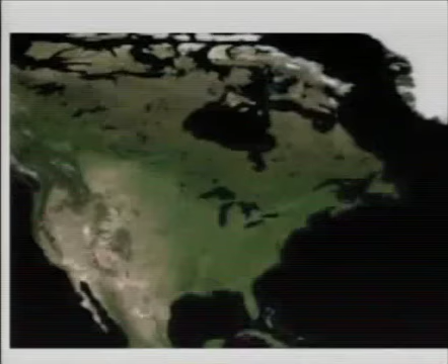The Starchitects, as he coined it, has been really interesting working at the range of scales of projects, as Brooke mentioned some of them already. Probably most importantly, that's where I feel we as a firm, I as an individual, and where I would like to challenge all of you to head, is how to embrace this integrated design into how you take your architectural education and apply it either in your studios or as you go further into the profession.

So I had definitely a back and forth. The family home in Vermont, we're going to see a little bit of that. University of Vermont, over to the University of Oregon, back to the Union of Concerned Scientists in Boston, up to Yestermorrow in Warren, Vermont, over to the Rocky Mountain Institute just outside of Aspen, then out to San Francisco to have an architecture firm with a friend and graduate of this program, Ned White, and then zoomed back finally after meeting my wife. We decided to move back east to be close to family, and ended up in Portland, Maine, or in Falmouth, just outside of there. So that's the map of what we're going to see in this first part.

So where it all began, we all have someone we need to blame it on. I blame it on my parents. They took me at the age of 12 to the hills of Vermont, and we moved into the basement of this house-to-be, and it took us 5 years to get the roof on. We peeled every log ourselves. We call it child labor, I believe.

One summer was spent peeling the logs, then you had to let it dry for a year to let it shrink. And even with that, we had to design the house so it would settle about 8 inches, an inch per log. It was a semi-passive solar house, gravity-fed water, composting toilet. We didn't have electricity for 18 years, until finally my dad's health went down and we figured out a way to get power up to it. But it was quite an experience.

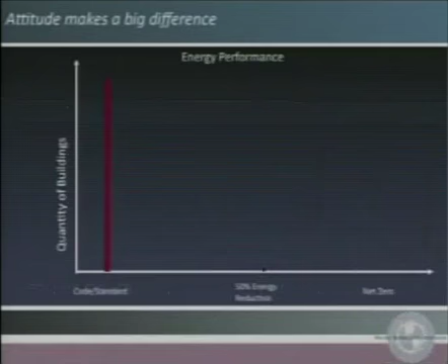And it was the base that this all a lot of, I think my passion early on was understanding about buildings, and you know these statistics, the impact that buildings have, and the impact on climate change through all the effort in terms of where buildings are placed and how they're operated have such an effect. And there's so many poor buildings, the majority of our buildings here, quantity of buildings that are just barely meeting code, and there's so much opportunity out there, was prevalent.

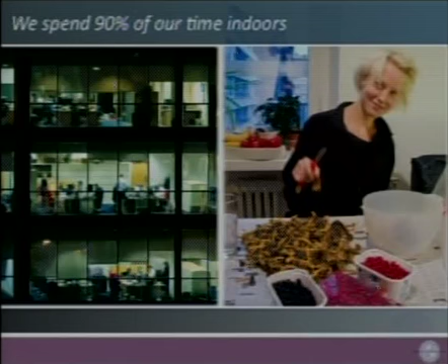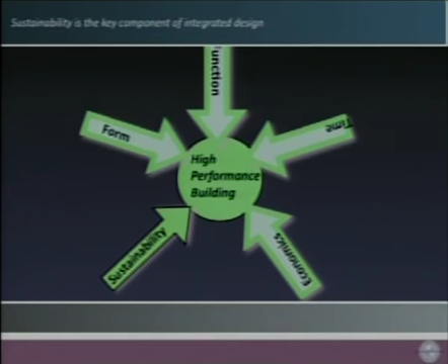And as I went on professionally, then it was, you know, the reality: we spend 90% of our time indoors, and is this the forming of where I wanted to go, this understanding, a lot of it built out of the University of Oregon. This is traditional building, but if we want to go further and really change, it's to this high performance side, it's really embracing this concept of sustainability and what exactly is that and what does it mean. And I still am learning what this means, and still am on a path to figure it out.

Something I did learn, and am still learning, is this whole idea of when do you put that effort in to arrive at a high performance building, and this whole idea that we get lost too much in simple concepts and we're not working hard enough to arrive at a high performance building. What it actually means is that to affect long-term performance and create these great buildings, you have to put a lot of effort in on the front side. I'm still learning what that means and how that affects the work I'm doing and the design teams I'm trying to engage and clients we're trying to lead.

So the University of Vermont was where this sort of started, and I actually ended up self-designing a major in solar architecture and thought that was where everything was going to go. That was helpful, but it made me realize I did want to be an architect, but maybe I should first get some experience out in the field.

And we'll see some pictures of these guys coming along, but two instrumental guys that formed where I was headed was David Sellers and John Connell, who was the founder of the Yestermorrow Design Build School. If you haven't sought out David Sellers or heard that name, it's kind of a fun little research project to find out. But for a couple of years, I worked for them doing design build projects, again testing what does this mean to be an architect.

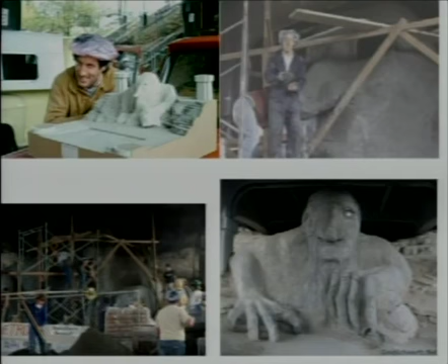A bunch of architecture students went up to Seattle. Steve Badanes had won a competition to design the Fremont Troll under the bridge, and a bunch of us went up there. I got to put the concrete in the nose, but it's continued on as a great little effort, especially at Halloween. That's an actual size there of a Volkswagen Bug.

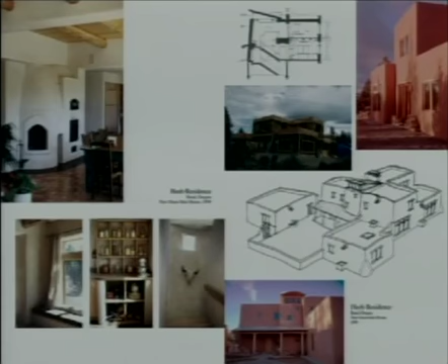Style was one of those things too that I quickly realized I did not have, and I'm okay with that. A client came to me and said we want to do an interior kitchen remodel, and they picked these cabinets, and I just went with it.

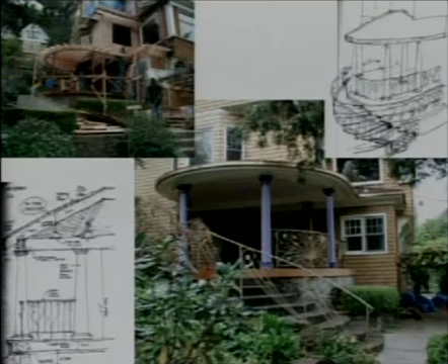You're walking around with a client, looking at different finishes, trying to develop what's their aesthetic. And I was like, wow, okay, here we can go. But there were a whole bunch of projects with Ned. They're smaller scale, residential.

Colors, the whole idea of engaging sketching - Ginger taught that to me early on, and how critical that ended up being, quickly being able to communicate. With the design build background, being able to do a quick sketch for a builder to apply to a design is absolutely critical.

A family friend ended up calling for a large project on the East Coast that I wasn't sure I could handle due to the scale, or whether I wanted to from a sustainability and environmental perspective. This was Lake Winnipesaukee in Wolfboro, New Hampshire. They had been going down a path with another architect who just wasn't listening, and asked if I could just come as a favor to look at it.

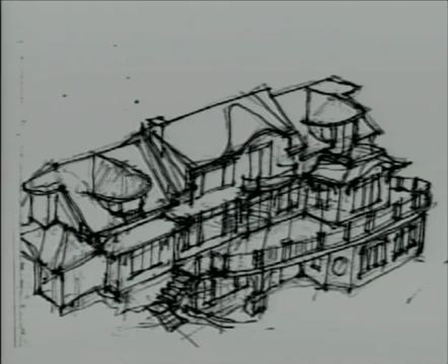I started sketching over the other architect's plans. The husband was kind of really into the macho thing, and the wife, Sheila, really wanted a little more sex appeal to the house. We ended up with something like this, but at 8,000 square foot house, I was going, what am I doing here? But they wanted it. It was an interesting opportunity, and we went forward and built it.

There was an existing house here - you can see some of the curves from another building. Here's one side of the building. I'll go through these quickly in the interest of time. But a pretty crazy roof - Howard's over there shaking his head. Oh my goodness. But the details, I think, are what were fun.

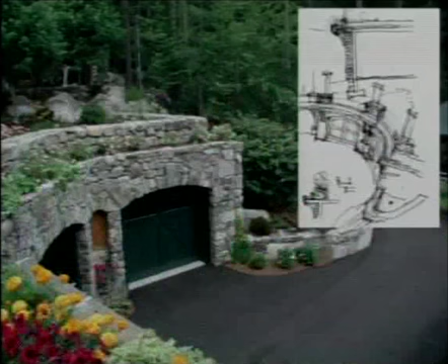The craftspeople that got involved in this - the client was willing to spend the money to look at ways of hiding the garage, dumping it into the hill, trying to work with sketches. The stonemasons were really, really excellent, trying to find those lines and connect them together from a detail perspective, trying to bring the rocks up, and how do you swoop that out appropriately. And then, oh yeah, the windows - how do you do the detail of that? That was a good exercise, Don.

The owner, Dave, was playing with blacksmithing, so he got involved in the project. They were embracing lots of craftspeople to participate, so they had little birds done.

The little sculpture - I designed the deck so all the water would go off this corner of the deck, and they got a sculptor involved, and arrived at this bear holding some fish. You can see down the bottom here some of the fish that got dropped below. So it was just, they were playful, they had fun.

You can see where it connects in and out of the mouth, and Fine Homebuilding put it on their back cover. The house is too big to go as a prominent feature in Fine Homebuilding - didn't meet their criteria, but it was just a fun little piece. The details, I had a lot of fun working through all of these.

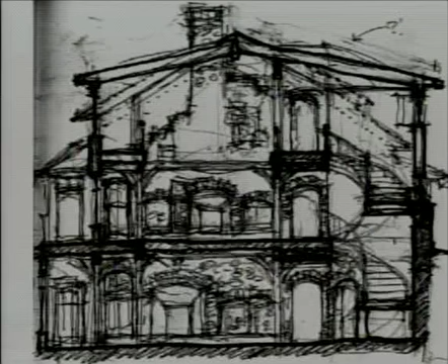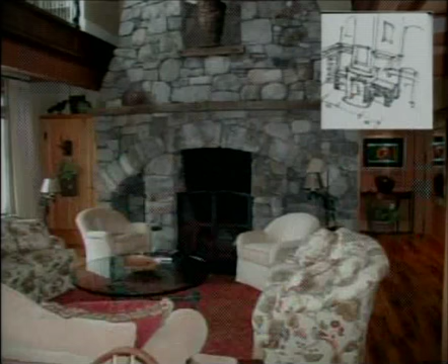Upstairs, the vaulted ceiling, just a gathering little library. They went all out with the tile work and everything, worked with an interior designer and tried to balance all that.

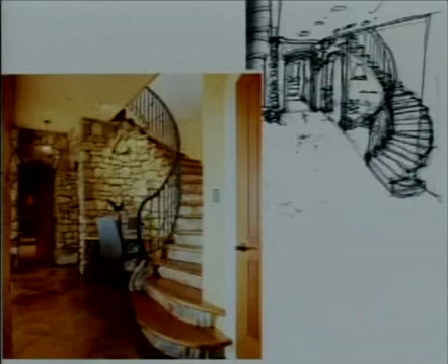Got to have a wine cellar, of course, and you need also the home theater. Downstairs bedrooms.

That was a really amazing project in many ways, but I got them to do foamed insulation, so we made the walls really high performance. The boiler - we were able to work with the HVAC contractor to get the boiler size right.

Worked with as much as I could on reclaimed wood wherever we could. There were so many battles that I couldn't win, but there were ones that I could, and I felt the building overall was a great opportunity.

But when you try to weave in the sustainability, it's going, that's too big, I don't want to keep doing that. It was a great house, and I love going back to visit it.

But the question was now, do I keep going with architecture, or do I fold back into the sustainability and green consulting? My wife and I met and decided to move east to raise our family, and it was a balance. So I continued doing some architecture.

Here's the before and the after of an addition. This is where I was starting to get Fore Solutions going, but was filling in the little holes with some architecture along the way.

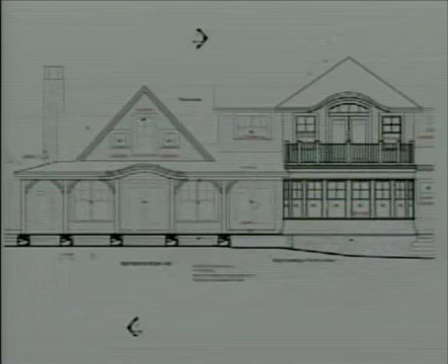This is where I learned that I don't really like hip roofs with pitch roofs. I should have learned that, but I didn't. But it still came out quite nice, the before in the lower right and the after.

Another lake house. And you have to hire the photographer to take some photos to make you look good. But just a nice feel, again, working with materials, natural materials, open sensibility, and just a couple more houses quickly.

Down on Cape Cod for some family friends. Little Compton, Rhode Island, sorry, not the Cape. This was a concept sketch, but that got simplified down from a budget standpoint.

I was just down there actually a week ago taking some photos of it. And this came up, I think, nice from a simplicity and organization standpoint.

They had basically a brother and sister married with kids, so 2 master bedrooms, with the kids meeting in the middle. From a diagram standpoint, this is the back side. It's simple scale, vaulted ceilings, using the space effectively.

Again, good heating system, good insulation, good windows, proper orientation. Oh yeah, I did keep this one in. And then this is one just north of me in Freeport that I designed, but we won't go into the details.

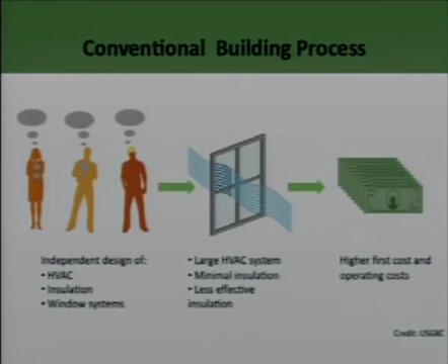But this whole idea of a conventional practice of everyone being in their silos, okay, is what we need to shift. The conventional practice is just getting the work done and not working together in sort of an integrated fashion where spending more money on the windows makes sense, right?

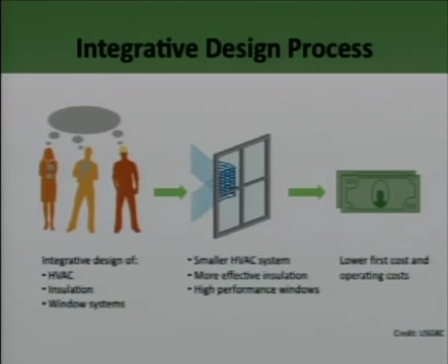Because by doing that and getting a better envelope and better insulation, you can downsize your heating and cooling systems, and that pays for the extra investment into the windows and the insulation. But that can't happen unless you get the design team together and do the analysis and do the math.

And that's something I know it's really hard in architecture school to put your engineer hat on when there's not a strong engineering department here at the U of O, and how to weave that perspective into what you're doing. So as much as you can, try and think that way.

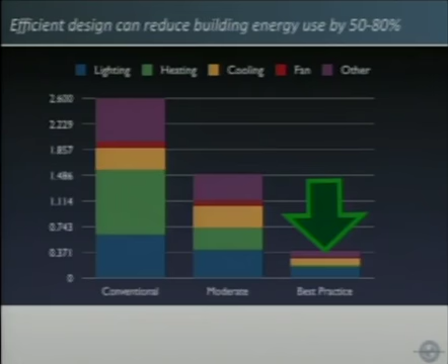But we're really finding some great success in lining up the team and walking through good design solutions that are trying to drill down to get those energy savings in there. And those initial things, and Oregon's great at this, siting, orientation, massing, is going to affect the long-term performance of your buildings without really affecting the budget.

And this is where so often we start working with an architect and they say, Gunnar, no, we'll get you in soon, don't you worry, we'll take care of it. And those initial sketches about programming that they're working with the client, trying to make sure the square footage can fit on the site, all of it is what starts driving the whole design.

And that simple move of the orientation is going to affect the long-term performance without adding any dollars to the building. So then you can do more. You can add more into the building, more controls. Green roofs cost more, but they slow down the rate of runoff of stormwater. And that could be good for a multitude of reasons.

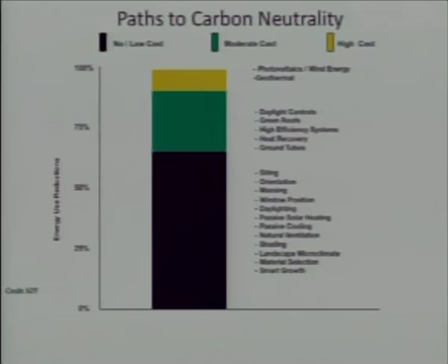And if you're trying for a carbon neutral building, yes, you may have to spend some money in order to arrive at it, but you try and do all these other things first before you start investing into those pieces. So the balance then, as a company, as a consultant, is how to weave in the environment and not let the economics be the driver. Because we're building buildings that are going to be around for a long time and affect the health of the occupants. So how do you bring that all together from an integrated design approach?

The contracts are an interesting one, and I'm not sure if this is still part of the curriculum here, contracts. Those are one of the pieces as an architect we don't really want to do. But the typical linear design process is going through schematic design, DD, and by the time you get to CDs, it takes quite a while.

And then the reality is you're getting to this bid negotiate, bid negotiate, bid negotiate, and that's actually where the value engineering is occurring. What we try to do from an integrated green building perspective is do that value engineering all the way through by doing the math and getting in and doing the energy model, spending more time in schematic design and basically getting the engineers to sit at the table.

And get the ducks aligned with the structure, size things appropriately, ask the right questions about envelope. And by the time you get to CDs, everyone knows how to put it together because they've all been at the table. Versus, I'm the great architect, and here you now heat it and cool it and light it, right? And I know that's inherent in this program, but it's amazing.

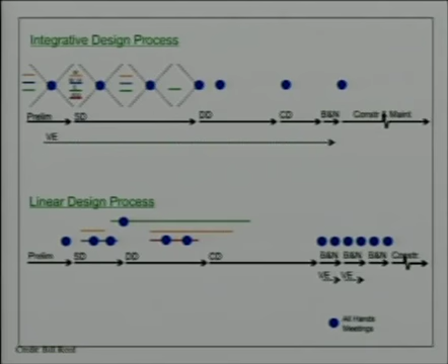Where's the water going? What's the ecology of place? And then you start bringing in the architecture after you've done the analysis.

So planning, mapping out the design process - when should people be involved? And that affects the contracts, right? How are you going to set up a contract to get these folks at the table when you're trying to design and build a building, and you as an architect have a fixed fee of 8% or 10% or 15%, and you have to fit the whole team into that.

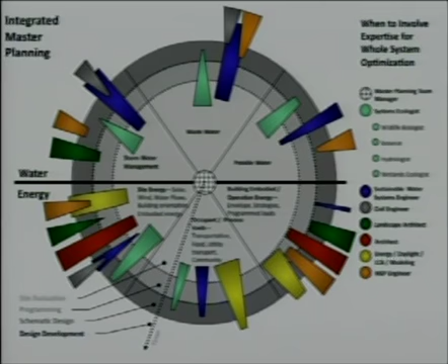I wish I had more clients to cite as success on this, but the goal is getting clients to agree to an initial charrette before contracts are signed. So basically trying to get everybody that's part of the team and the owner into a room for 1 day, 2 days, 3 days, maybe more, trying to design the whole project in a charrette format, engaging with each other, trying to figure out: do we have everybody we need at the table?

And based on that experience, everyone goes away knowing what the client's interested in, capable of. As a consultant, I might realize that engineer's not really thinking outside the box, and we need someone else at the table to push it, because they've already sized the HVAC system for a 40,000 square foot school before we've even worked out the orientation of the building. So something's wrong here. If you're successful that way, contracts are put forward where everyone knows their role, and you have more opportunity for success from an environmental perspective.

Another example: we've been working on a project, the University of Massachusetts Sherman Center. It's a large lab facility underway, and they've been pushing for LEED. We're the lead consultant, but we're also doing the energy modeling. We started laying out tasks for the site based on their schematic design, and they had a major timeline. This seems simple, but the reality is it's not done.

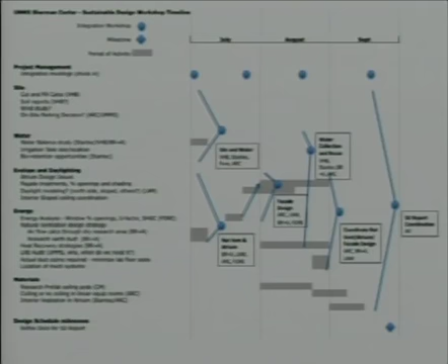Based on the results of that, we can start really fine-tuning the facade further. And once we get all the massing right, we can look into ways to capture water, et cetera. So we planned out meetings of the team to get together - all done after the initial one. It's just a sample of some of the ways that you can design the design process.

The integrated approach is where you get these great results, right? All these aspects come into play when you put them on the table right from the beginning. And it's the success of communication and talking where you get those benefits.

So LEED ends up being a tool - that's all it is. LEED is not the goal. A lot of firms and clients are saying just do LEED, and thankfully we're getting hired sometimes because of that, and it's okay. But what we try to do from a LEED perspective is use it literally as a way to follow good design practice - it's not the driver. Too many times, and that's where if you Google LEED, a lot of folks are pointing fingers at it, saying it doesn't think enough, and there are a lot of people misusing the tool.

It's been very effective, and what it does is establish criteria. It gives a structure for thinking about environmental issues, about how green your building is. We know more about a cookie box off the shelf than we know about the buildings we walk into. That's what LEED is trying to do.

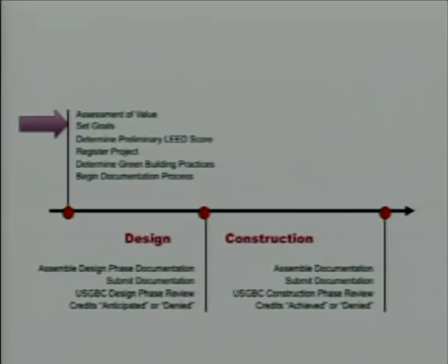It's set up with design credits and construction credits, but what I think is the greatest thing is that it pushes toward front-loading the design process, getting the team around the table right from the beginning. That continues to be hammered on because of the success stories out there about good green buildings.

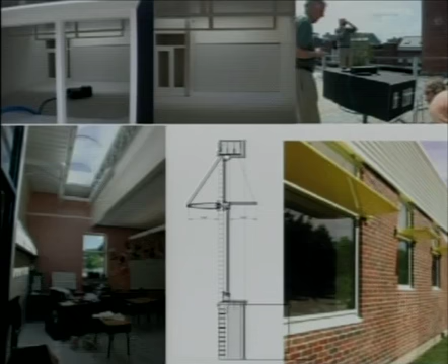This I put in for Ginger's benefit—see, I did learn something, I can do a box and we can do light meters. That does inform design, because what we found is that in this existing building, trying to incorporate daylight, we needed a skylight monitor in the back, because having it just on the south side wasn't enough. Then it was a matter of how you design that, and the architect had fun with the light shelf itself, bouncing light in.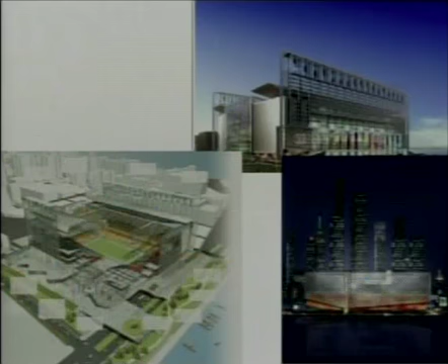In New York City, KPF brought us in for the Jets Stadium when they were going after the Olympic bid, and this was already far along by the time they got involved. There's a lot of beer drunk at games, it turns out, and when you look at waterless urinals, you see the amount of potable water you can save given the number of people attending a game. So we started doing some analysis to help conserve water.

This actually had vertical axis turbines in it, which seemed pretty neat as a concept, but it did not meet the budget at all. In fact, the consultant goofed and misread the wind rose, so they did not produce like they were supposed to. The added steel structure got booted down the road, and that's where the design was headed.

KPF did a whole redesign to a glass box, and that had its own inherent problems. We realized these big architects have neat ideas, but weaving solutions into the architecture and making sure it performs and meets budget was going to be a major problem, especially with the western setting sun on the Hudson.

The design of this project was spanning over the railroad tracks at Penn Station—a pretty interesting site. But what that did was give confidence to KPF, and it was actually Chris Stoddard, another graduate of the U of O program, who brought me onto the shortlist for City Center.

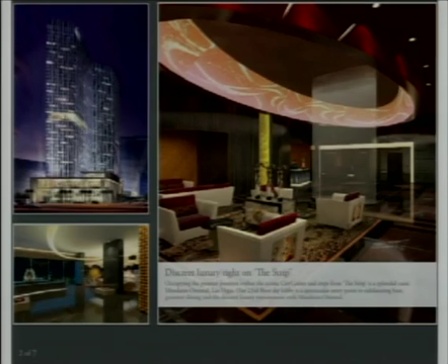This one is a story I'll get into in a second. But it was an amazing experience working with all the interior designers, trying to green them and work with these architects. Unfortunately it meant a lot of miles on the plane to Las Vegas and back from Maine, which is not a green thing.

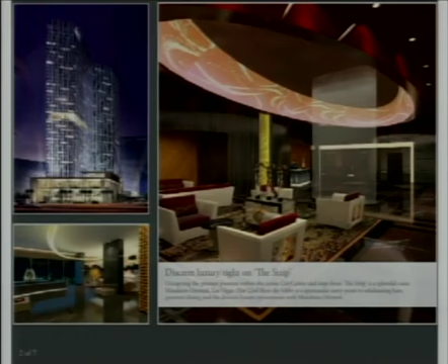It was, do I play with the devil or don't I—similar to the Meredith residence, which was 8,000 square feet. Do I help out these family friends and have some fun doing great design work with great craftspeople? In this case, they're going to build this building anyway, so could I help make it better? Yes, I stayed involved, and there was an amazing amount of design work and coordination effort that went into this.

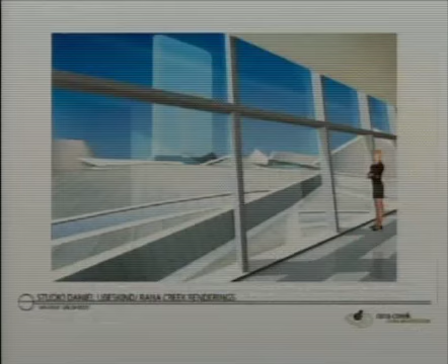Just to pull out a couple of nuggets: this whole roof for Libeskind was a big old shiny roof that, from a heat island effect standpoint, we wanted to do something about. So we brought in the idea of a green roof, but you don't want a green roof in the desert—we really shouldn't be building this building anyway. In fact, Vegas shouldn't even exist, because it's a desert and there's no water. But in this case, let's try to help and not hinder.

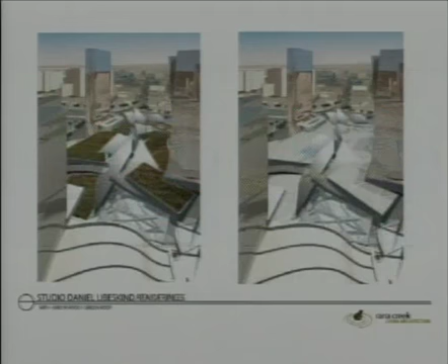There were some really interesting ideas put forward about how to still work with the architecture—this spine shattering up through the roof that lets daylight into the central core—and how we might work with the proper species for that, and handle and maintain it. That did not make it, let's just say.

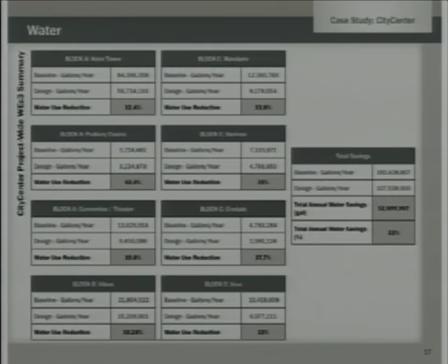But water was one area of success. We ended up with 33% savings over code through choices in fixtures within the hotels. It's a lot of showers, faucets, and sinks, and we were able to work collaboratively with the designers to arrive at low-flow fixtures that met their aesthetic, achieving major savings across the board.

But a crazy amount of materials and steel, and this is, for many reasons, not a green building, and we can debate that all night, but the fact is, it went forward.

The biggest thing I think from this was the corporate shift for City Center, for MGM Mirage, saying we're gonna make a green building. What does this mean to us? They took it on, and they are using it to help foster change in all their projects globally. So it's really interesting from that perspective.

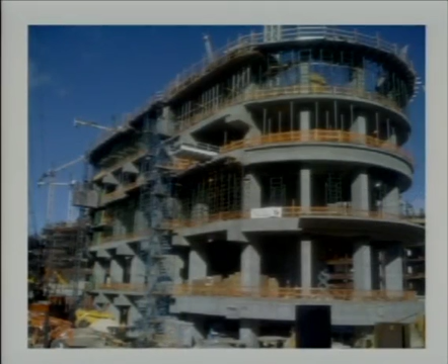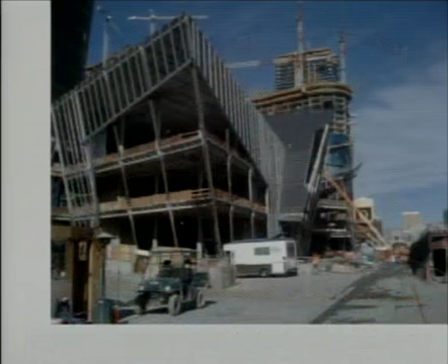Just a very quick story: this Harmon Hotel ended up getting put on hold because there was a major structural problem where these beams needed to have the rebar go out to a horizontal bond beam and wrap around the rebar that was going horizontally. The structural contractor didn't do it, and they found it too late, after the facade was already going on, and put the whole project on hold. In fact, they had to knock off the whole residential tower on top and not build it because of the structural implications. So that project is just shelled and dormant. Talk about some lawsuits—not my problem, though, I'm glad to say.

And you can't have a glass building in the desert and still try to get to 14% better than ASHRAE code, which is a requirement for a LEED building. So here are these horizontal light shelves, shading devices, that wrap around the whole building, which many, many times were tried to be value-engineered out because they cost too much, and they were able to keep it.

Because they couldn't build the building and meet the standards the client had put forward without them. So the Foster—actually the blue tinting was not their original concept. They had so many other great ideas to meet it, but they did not have the budget to meet it. So it was an interesting case of hiring the star architects, setting budgets that weren't real, and saying 'now go do it green,' without communicating the implications of that.

So a lot of lessons learned here. I think it's still a success in many ways, but not necessarily the one you want to tout as the greenest building you've ever seen.

But it was just, they're my kids, bringing them along—this is what Daddy does. We work on big buildings every now and then.

There's inside, there's a couple of shots of the Libeskind project, just amazing spaces, but with a neat feature—we were able to maintain, in the lower portion, radiant cooling in the primary pedestrian area to help temper where the people are, right? Buildings don't need heating and cooling, people do. So you put it where it needs to be, and that was a great energy saving for a building this scale.

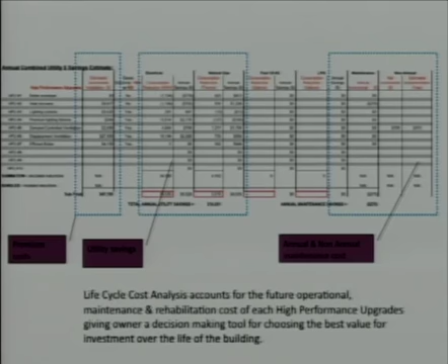I'm going to jump through because of time, but here's just an example of the analysis we do on projects when we get brought in. It was an auditorium building, and we had a lot of pushback initially from the HVAC contractor and engineer. We helped go through a whole effort of looking at utility savings based on different high-performance upgrades—lighting controls, heat recovery, a bunch of different things. But the biggest move was right here, where we introduced the idea, and the engineer was pushing back on it for the longest time.

Finally they went with it—the simple idea of putting the air where the people are. So we delivered the air into the seats for the auditorium and returned it up high, and that was one of the measures we went through. While it cost more, we were able to pencil it out, show the energy savings, and convince the owner to go in that direction through doing the math during the design phase.

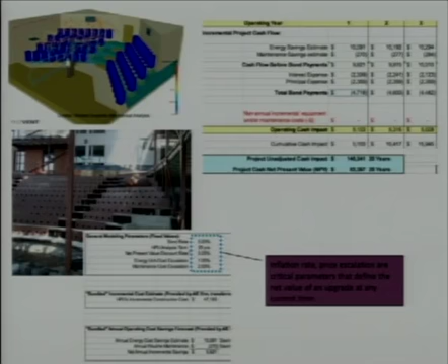And so this is during construction, pulling together. So that was kind of fun.

LEED for Homes is something we do in the state of Maine. We're the LEED for Homes provider. And just a couple of fun examples.

I know time is of the essence here. There's Norman—I've never met the guy, although I've been working with Foster and Partners for quite a bit. This is what their studio looks like, and that's only a small portion of it in London. But this is an opportunity to see all these different offices and how they engage in projects, how they work with their employees, the dialogues that you have.

It's been a really interesting path to go on. And I think the one of these architects we've been working with that have an international reputation that I've enjoyed the most is Behnisch—Brooke worked for them, and they bring us in. They do green buildings. This is the Harvard project I'm going to go into some detail on.

It was the Harvard Allston Science Complex across the river. They're building a whole new campus, and Behnisch came up with the idea of creating a quad, the true Harvard way, through 4 buildings versus one big massive one. And they designed platinum level buildings. In this case, the client only wanted gold, so this was the first time we were hiding LEED credits from the client.

No, we're not sure we're going to get that one. We better not—so we were worried it was going to get concepts cut or get value-engineered out. But Behnisch brings us in because they don't want to handle the paperwork and sort of herd the cats in that regard, and we're happy to do that for architects like Behnisch.

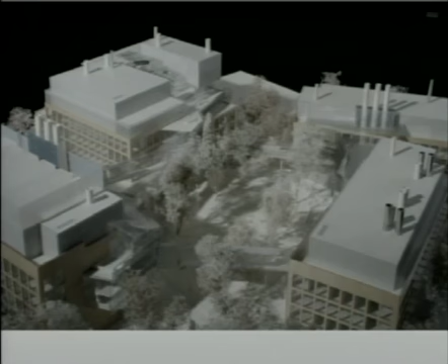But the different buildings—again, I know I'm moving quick through these, but I'll blame it on Colin and his roommates who said more pictures is better than less. So we're on the more pictures side here. But here are building 1, 2, 3, and 4.

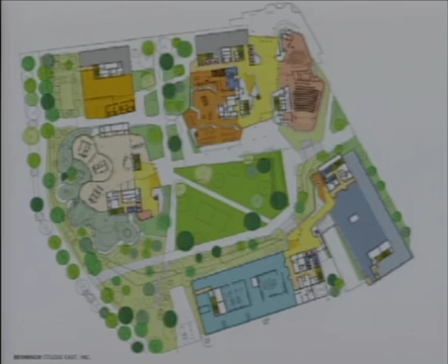You can see some of the organic shapes that Behnisch is great at incorporating. So you have the face that meets the public and the street edge. Start noticing what's going on with the facade here—they're really good at changing the facade to address proper orientation in terms of climate and engaging with the streetscape.

And this is an interior courtyard, and they do a lot with what are called winter gardens—tempered zones that help with transitional spaces, also used when the climate's right for tempering, just hot air rising and exhausting up and out, without needing fans, pumps, or motors, while still engaging in a very dynamic building.

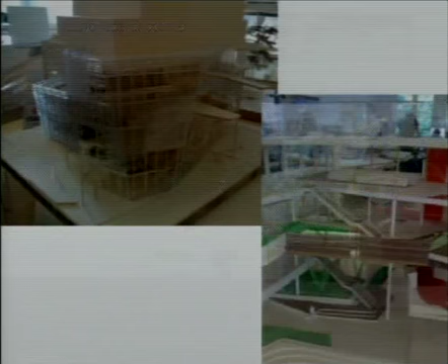A model of that in the Stuttgart office—here's the engineers for it, Transsolar. If you want to explore what some innovative engineers are doing out there on projects, I urge you to look at Transsolar. In this case, they came up with the idea of bringing an earth duct into the base building to use the earth's consistent temperature to temper the air into the atrium spaces.

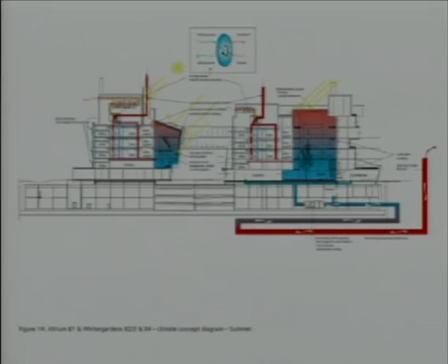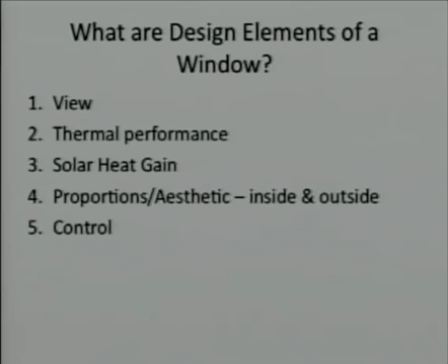Then the same concept in some of the winter gardens, allowing the air to exhaust at the top, and a myriad of other ideas. But I think the whole idea of the window is a good little exercise. What are the 5 things that a window does? View, thermal performance, solar heat gain—you have to control that—proportions, aesthetics from the inside and outside, and control. Does it have a level of operability? Did I miss any? I think I got them all.

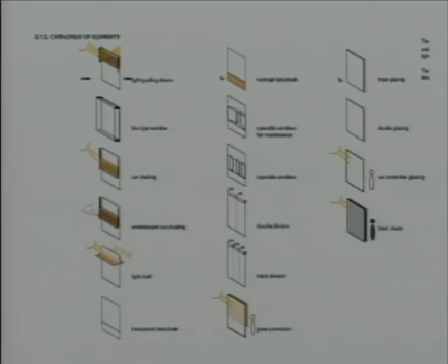That's where I thought. But here's how Behnisch takes it from a design perspective even further. Here's this whole facade package that was going out, looking at different concepts they were using to explore windows in terms of wind resistance, exterior shading, light shelves, level of transparency, how many panes, glare protection on the inside, level of operability, triple or double glazing—basically tuning the glazing and controls.

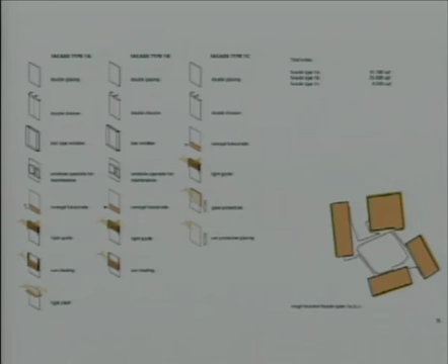Based on the orientation, that went to this—different levels of facade types. This is just one page of this package, and here's the diagram of those 4 buildings showing where those different facade types were, and when you put it all together for type 1, type 2, this is how they overlaid based on the different orientations of the building itself.

And then trying to help from a diagram, from a pricing standpoint, with the facade companies who were bidding on how to actually make this, here's how it diagrammed out architecturally. And again, just one side. And then in section, how you might have an upper level, here's two different types, with a level of controllability of sunshades, operability, what an exterior sun shade or solar shade might look like, and how that all attaches.

It was really, really well done. Models to help communicate the idea, and then a whole mock-up. In this case, because it was a lab building, you don't want to have operable windows in a lab building because you're trying to keep clean environments for doing your testing.

So we still wanted, when the temperature was right—and this is the East Coast, the fall and spring—when you could actually open up the building and let it breathe and not have to worry about tempering it. So they came up with this concept of doing it through the skin of the building, through a filtration system.

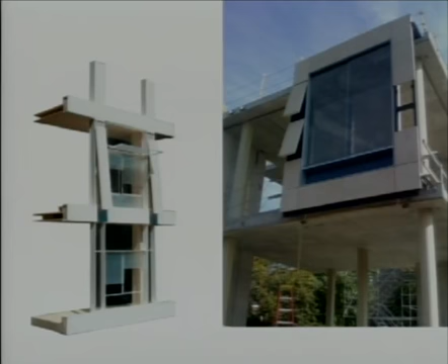Wow, that was fun. Did I have anything to do with that? No, but we were there. Well, I was there, I saw it. I took the picture. But the fact is, there are so many projects like that where someone's not there jumping up and down. Behnisch is already doing it.

What I was working with was how much glass—when VE started happening at certain stages from the client, we were trying to use the LEED criteria to help guide some of the decisions that were on the table. But really interesting, there are a couple other pieces from it.

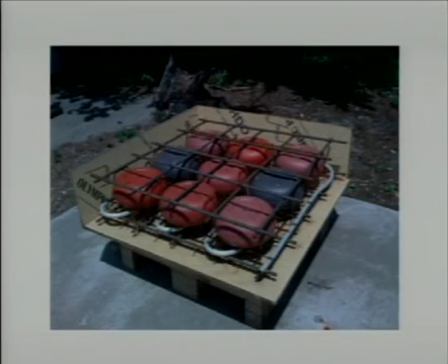How to reduce the amount of concrete—the engineers put in voids, basically using air-filled recycled plastic voids within the grid of the rebar. And here you can see a mock-up of the radiant system, which was going to radiant cooling into the ceiling.

That was part of the tempering. This was a way—I should have the statistics, I'm sorry—but it shows how much concrete they were able to not put into the building based on this concept. Concrete, from an environmental perspective, has a huge impact on climate change, so they were doing the right work there, working collaboratively with the team to arrive at that.

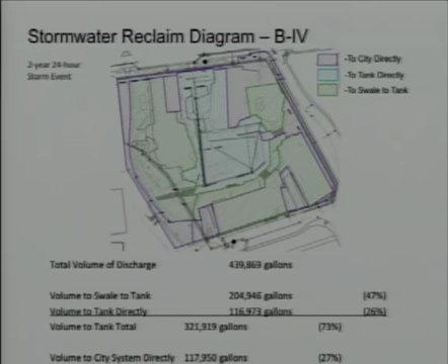Some of the stormwater pieces I thought were also great, trying to capture everything from the roof and take it through a bioswale into storage tanks. We were also capturing condensate from the buildings, piping it back up into the building for flushing all the toilets in the whole building. We were able to do the math with them, and that's what we were actively involved in—trying to find out what would go away versus what we could capture on the site and contain.

So just some time—we're going to fly through these just for fun. We had the opportunity to jump over to Dubai. All that work's gone away now, so this is just fun pictures of imaginary projects, it turns out.

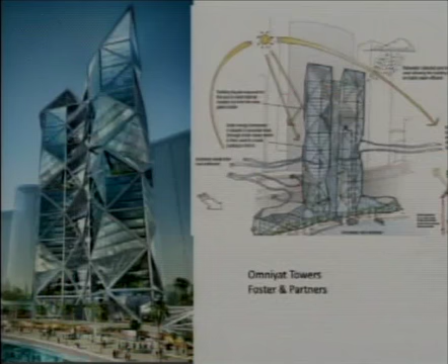The tallest building, the scale they were working on—we got brought in by Foster & Partners on a building similar to the Hearst Tower in New York City that they built, some similar sort of structural concept. We did the proper analysis, working with a consulting engineer for that project, but because of the economy, it's not going forward.

But it was a challenge underway because of the extent of glass in the desert, and we were already facing some high challenges. We were brought in to actually do the energy modeling on this one, the World Trade Center, designed by Atkins, with photovoltaics woven into the whole facade. That's part of the whole pricing on that one, and that supposedly is actually going forward.

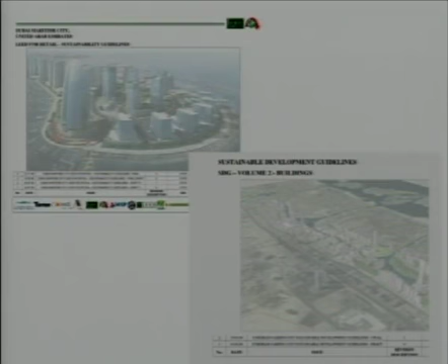We worked developing some guidelines for Jumeirah City, a huge part of Dubai, where by creating these guidelines you'd end up with LEED gold buildings for any project that went into this development. That was what the client asked for. And then similarly from a retail perspective for some of the work going on in Maritime City, also in Dubai.

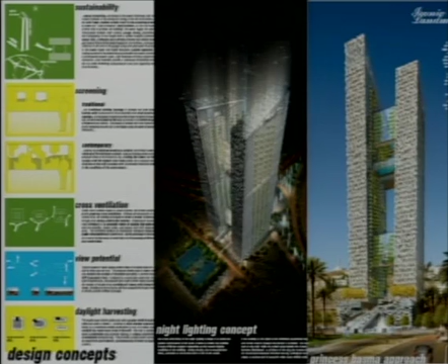Both those projects are on hold, wondering if they'll ever come back. Murphy/Jahn brought us in for a project in Amman, Jordan, for some residential towers on a pretty interesting site. They were not going to get the light pollution credit for this one, I was pretty sure of that right from the beginning. But Murphy/Jahn was doing quite a bit thinking about orientation, views potential, cross ventilation, daylight harvesting, and we were working away on that, through design development, and that one went on hold as well.

Lovely economy that we have. In Bahrain, we didn't work on this one, but it was a cool building with windmills incorporated into it. I've heard that these are not spinning because the building's not fully occupied, and that when these start spinning, they're generating more electricity than the building's currently using, and the utility's not set up to take electricity back. So they're just sitting there looking pretty right now until the building's occupied and they can use the load.

This is a Bahrain developer who brought us in to look at a new sustainable city for 250,000 people. They were looking at a site in northern Africa, Tunisia, and we were brought in and helped facilitate a guiding charrette internally to help figure out what the city would be. We convinced them that we had to help write the RFQ, RFP, and we facilitated that process and shortlisted a bunch of firms, down to 4 firms that we were going to interview with the client to evaluate who would win the bid to create this master plan for a new city. That's also died as well, but it was an interesting exercise, I think.

There's some good examples out there, and this is one of those to scribble down in your notes if you're doing any planning: this One Planet Living criteria that's out there. It's really, I think, one of the better ones that is thoughtful about all the different aspects that should go in from a master planning perspective.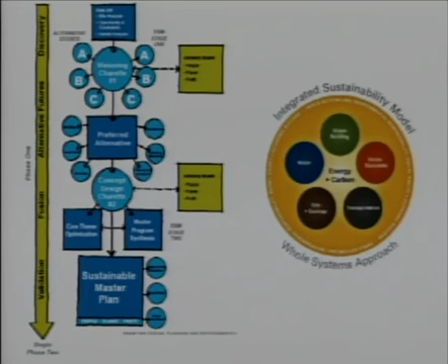This was a result by Arup in the RFQ process, taking what we had come up with as guidelines - offset emissions, reduce and eliminate waste - and they put it into a diagram, and this was really helpful. This was EDA's diagram of how we basically had the RFP written about how you do your process. Explain your process, don't show us how you're going to design a city for us, we want to know how you're going to pull the team together and facilitate it. So it was just some interesting efforts about planning, looking at a city scale, cultural, historical, and just some fun ways to think about how you plan and approach different projects.

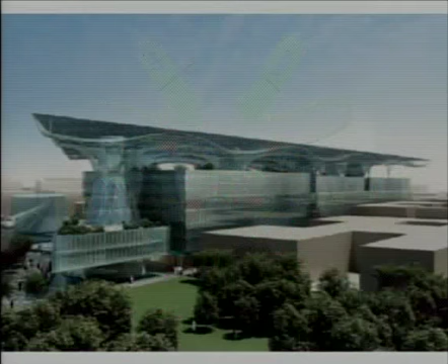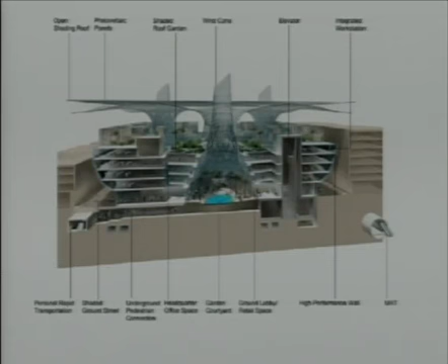This one I'm just going to fly right by. It's Masdar headquarters, designed by Adrian Smith, that we're helping a contractor in Dubai bid on building. That whole roof is covered with photovoltaics. Adrian Smith had been with SOM, he designed the Burj Dubai, the tallest building in the world currently, and he's left to do his own firm. But I thought it was a pretty interesting effort. Who knows if it'll actually get built, but the idea of trying to use these central cones as a way to get hot air rising and try to get some shaded, tempered air.

You need to pay attention to what's going on there architecturally. It's where you're going to be doing a lot of projects, most likely, because there's statistics coming out about 50% of all construction going on in China by the year 2030 or something like that, globally. There's these crazy numbers, and I apologize, I should have that better. But Europe urbanized in 100 years, the US in 40 to 80 years, and they're doing it in China in 30 years with amazing amounts of people. So the resources that are there, pay attention, participate, and help where you can.

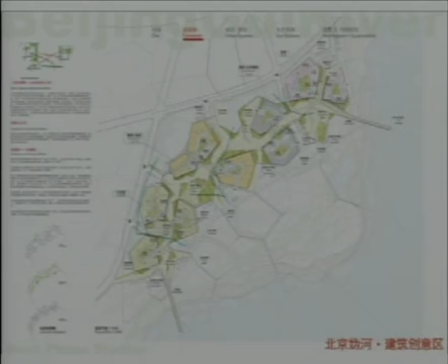This was a competition that they actually just lost, but Next Phase Studios is a Boston firm that we do work with, and one of the principals there had been at Behnisch, so we work a lot with them. This was a concept for a mixed-use community over in Beijing, from an idea of really weaving sustainability into the design. These are the boards from the project itself, trying to incorporate a river edge, pedestrian path, vehicular, and how they were weaving the design, looking at the climate data, transportation data.

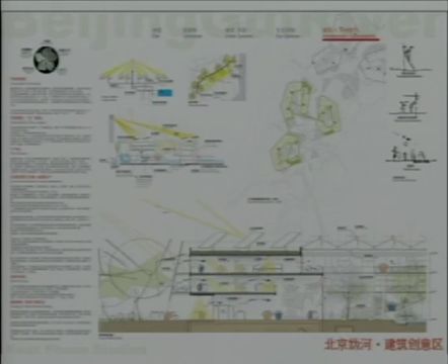Occupancy, and through an iterative process, arrived at a pretty dynamic shape of a building, embracing sustainability using some of those tempered spaces - it was a winter garden concept - along the perimeters, trying to push the idea of directed solar onto a central solar thermal collector for the whole community. They were weaving in a lot from allocating spaces accordingly based on orientation, function, and use, and then bringing in a playful side of the water.

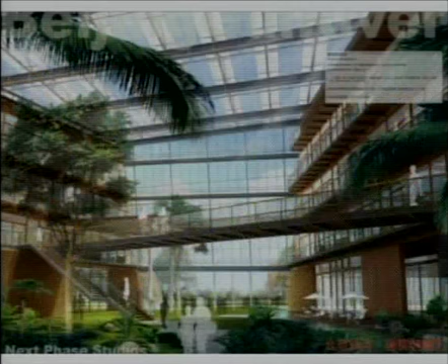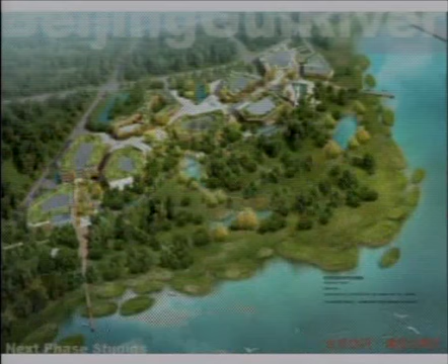You'll notice this design from the forest - they sent an image over to their modeler from the forestry building that Brooke worked on as an idea for some of their atrium spaces, and it came together with this really interesting, responsive weave of the ecology and the marshlands and where the water's going, and how to bring habitat into the development, trying to keep the massing at an appropriate level. So letting pedestrian access, but trying not to have a further impact onto the ecology of the area, through doing development that is appropriate for the region and respectful to the climate and the uses being put forward.

So this was a competition - they were up against Zaha Hadid, Foster and Partners, UN Studios, and about 3 other firms. And they lost to UN Studios. But I think as an example of where firms are going, where they should be going, this was the most sustainable solution for that competition. The owner ended up going with UN Studios because of having a bigger name. Next Phase is not as known, but I just love - if you start in your precedent studies, as you start looking around for who's doing what, seek out those architecture firms that are really trying to push this side, okay?

So to me then, and I swear I'm coming to the end, Howard, I am. I know you're getting antsy over there. We're getting there. What this all means, I hope, is that you're at the U of O for a reason, so that when you leave here, your hat is not just saying 'I'm just the designer,' but that you're our clerk of the works, and that you're doing more than just designing.

That's obviously what we're trying to learn, but too often we get caught into one task, and we get stuck in a rut. Doing your job may not be enough. We have to actually push a little bit further.

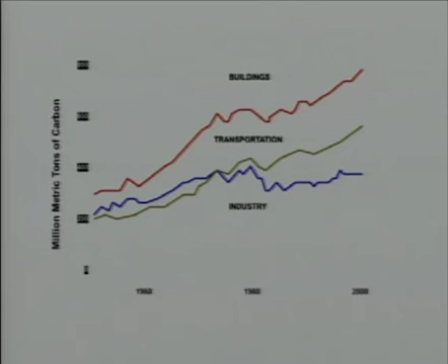Buildings have an impact, and you as architects can be a leader in terms of what's going on with our built environment, because it is having an effect on what Amory calls global weirding, and it's going to cause some very angry snowmen if it keeps going along this way.

I hope I've shared a little bit of my past to give you some perspective of what a graduate might do once they leave here. So take a little time, sit back and think about what you're doing. Look for beauty in nature. Fire, although we can make it, we need to look at that one up in the sky to guide us, not light it.

Bring ecology in. I was happy to see the studio running and a bunch of classes keeping that up about respecting nature and the different biosystems and the needs that they have. Think about infrastructure, about passive as the first way to go, rather than burning fossil fuels.

So some concepts to end with, and I wish I'd spent a little bit more time on this, but sustainability - while I say I'm a sustainability consultant, a green building consultant - the biggest hammer that's been hit on me recently is that it's not enough. Because basically sustainability, I was told, is just a slower way to die.

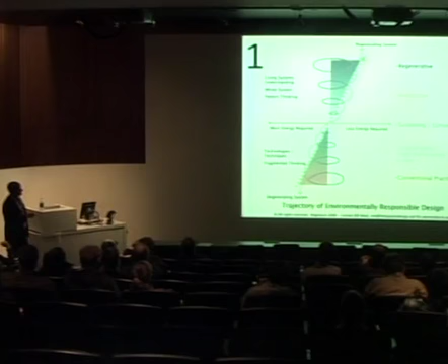So sustainability is good to keep us at a certain level, but we need to start looking a little further into creating buildings that generate more than they use, and clean the water, clean the air - sort of restorative, regenerative developments. And that's a path that you need to go on.

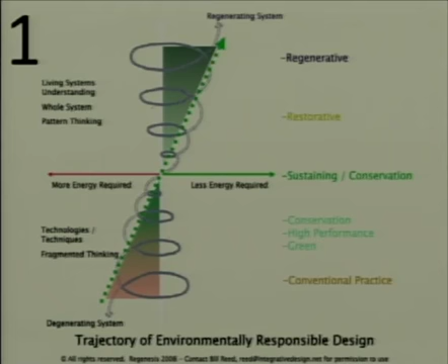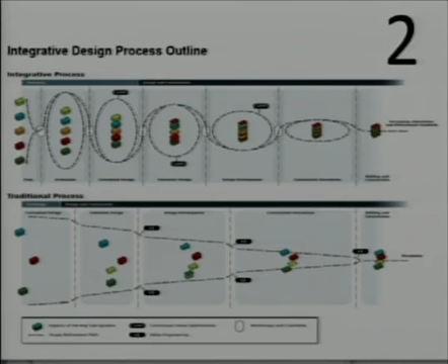And this integrative design, if it's not talked about enough, jump up and down, have it be your design build phenomenon at Oregon and get more engineers in to critique your designs, because the decisions that are made at the table early on that include the engineers and that level of analysis - it's an iterative process as you go through a design process, it's not linear, and you need to work on that.

And as faculty, I teach this, figure out ways to do it. Bring in habitat early, water, energy, materials, budget, and to arrive at the design. All that is critical. And once you leave here, it's not happening in your offices.

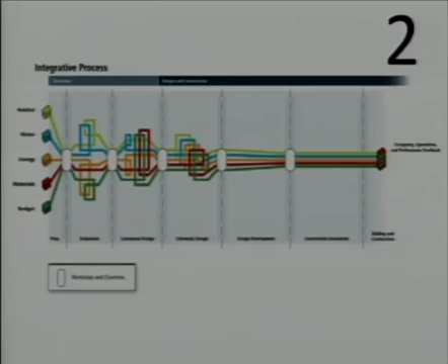There's a lot of fuddy-duddy architects out there that are not embracing this, and it's up to those coming out of schools to work and push some of these ideas and weave it into the fabric of the architecture that's out there. And finally, it's a balance, it's a process.

I am challenged every day trying to figure out how to do this. I want to help create better buildings, but I'm constantly learning every project. And I love that aspect about the work that I'm doing.

Staying in budget doesn't happen so often, and it's a constant challenge to try and look for those opportunities to use budget and use the economics as a driver, because that's a language so many people can understand, but they're out there.